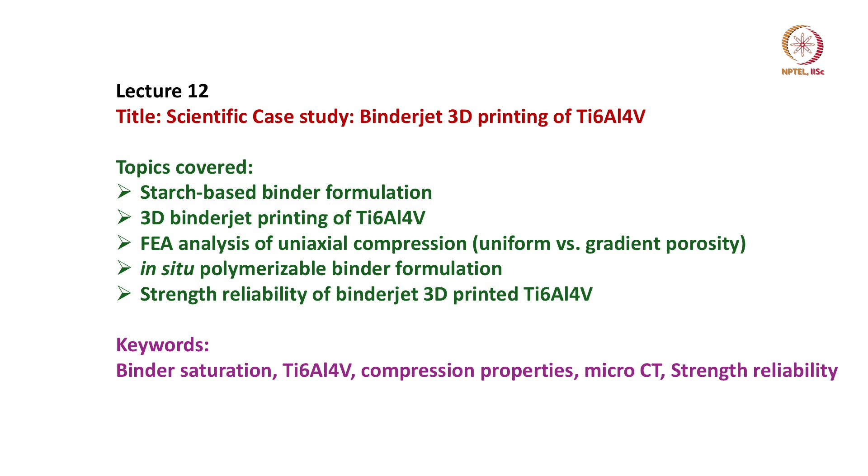So, in this lecture I will be presenting the first scientific case study on the binder jet 3D printing of titanium 6 aluminum 4 vanadium. This titanium 6 aluminum 4 vanadium is one of the materials used for a spectrum of applications from aerospace to biomedical applications. We have started working on binder jet 3D printing. The first material that we have tried is Ti6Al4V, and we have used several binders. The first binder is a starch based ink.

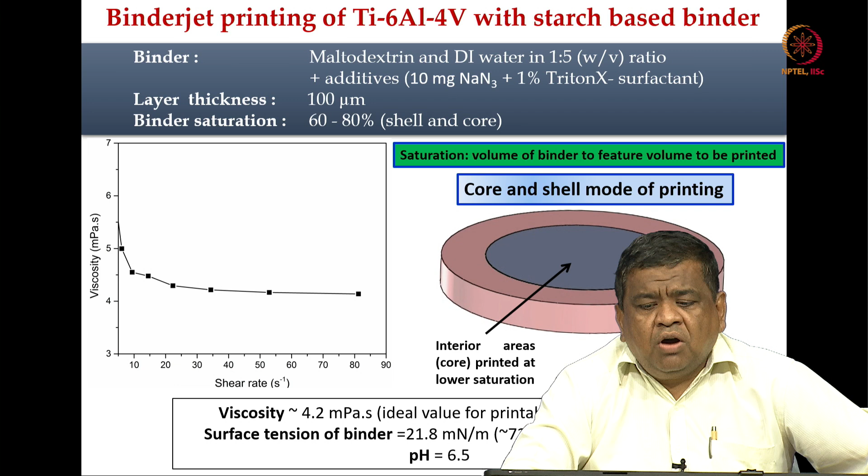So, what are the experimental details? We have used maltodextrin and deionized water in a 1:5 ratio, and we have used certain additives like sodium azide and 1% Triton X surfactant. Layer thickness we kept at 100 micron, and binder saturation was 60 to 80%, in shell to core mode.

What is core and what is shell mode of printing, that I am showing here, and I am going to show another scientific case study in the subsequent lectures, where I will show that this core shell mode of printing is essentially not advantageous for ceramics, and it leads to inhomogeneous microstructure and properties, but for metals it has not been that challenging, and we have used binder saturation of 60 to 80%.

And what is the definition of binder saturation? That is how much is the volume of binder to the feature volume to be printed. So, that means 60% of the volume of the binder is used to print a certain feature volume. So, these are the interior areas of the core printed at lower saturation, and this is the exterior walls that is printed at the higher saturation.

So, this particular binder, which was essentially maltodextrin and deionized water, has a viscosity of around 4.2 millipascal second, and ideally for binder jet printing the viscosity should be less than 30 millipascal second. So, that is fine. Surface tension of the binder is 21.8 millinewton per meter, and for deionized water it is 72. So, surface tension is greatly reduced by the use of maltodextrin. pH is 6.5.

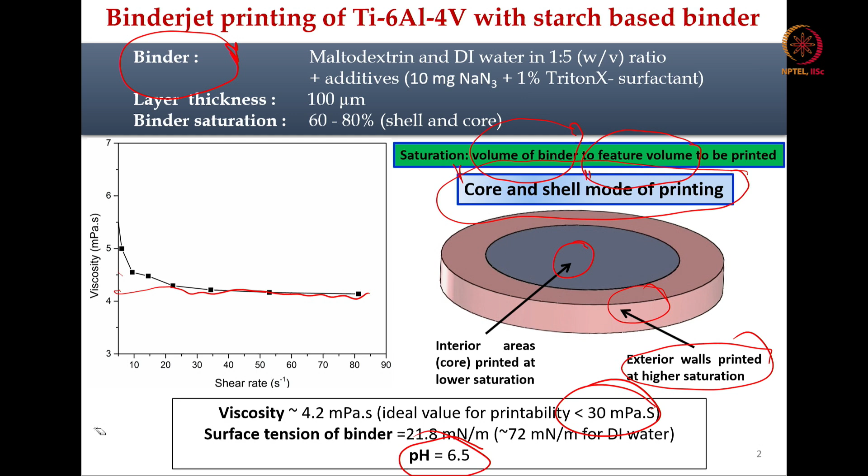We also made some attempts, but we still need to work on it, at the femoral stem part of these materials. We find it challenging to fabricate a femoral stem component with clinically acceptable strength properties, and therefore, we still need to work

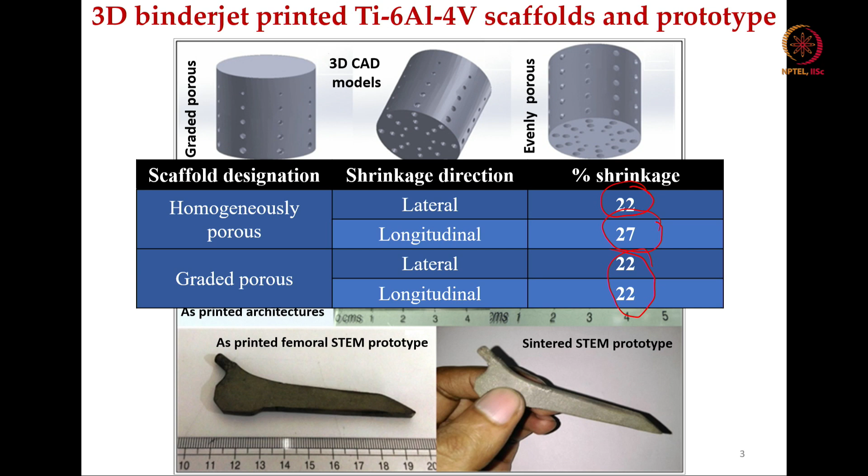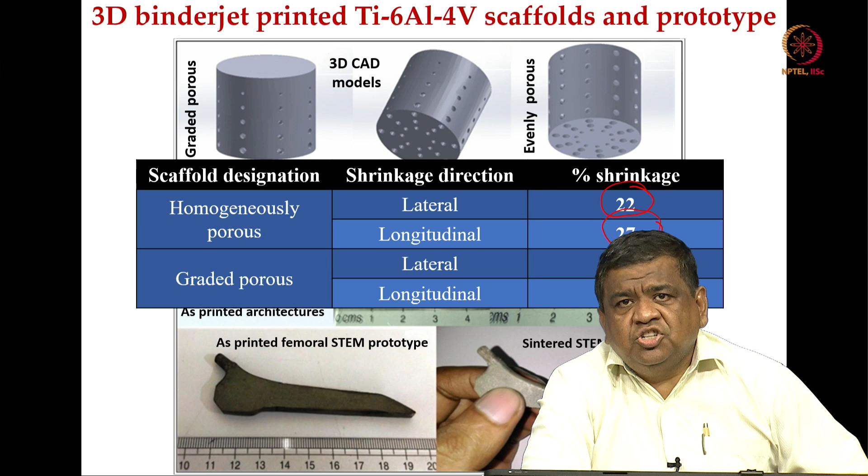on that. Now, in terms of the homogeneously porous scaffolds and graded porous scaffolds, we found in the lateral direction it is 22% shrinkage, and in the longitudinal it is 27% shrinkage. But the graded porous materials are much better, because in both directions we found uniform shrinkage. But homogeneously porous ones have certain anisotropic shrinkage properties. So, from the manufacturing perspective, I think this uniform, non-anisotropic shrinkage is much better.

We use microcomputed tomography analysis. This microCT analysis is something that I have taught you before. Just to recall, microCT essentially uses a high energy X-ray beam, like a 70 kilovolt X-ray beam, which is focused on a 3D object, and then it gives you 2D slices or 2D projections, what we call ortho slices. Now, when these 2D ortho slices are reconstructed in the z direction, you get a 3D reconstructed volume.

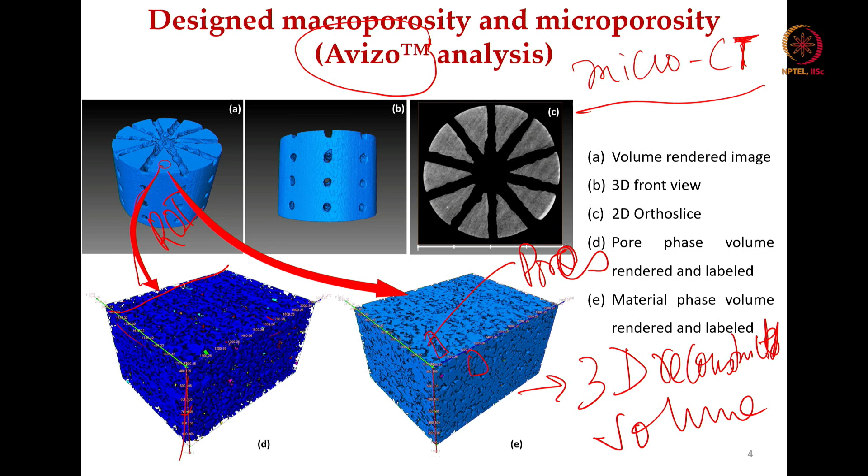So, what you see here is essentially a 3D reconstructed volume, and in this 3D reconstructed volume you can clearly see these are pores. This is taken from your region of interest or volume of interest, and when you put this volume of interest in x, y, z directions, you get this kind of porous structure. And we are more interested in the gradient in porosity, and seeing that by introducing the gradient in porosity, you can develop better properties, or whether properties are being optimized or compromised. We have used a specific software platform, Avizo software, which is used for quantitative analysis of the 3D microstructure.

What we have done is take these 3D microcomputed tomography results and use them as an input to the ANSYS Workbench. There are two ways you can do this biomechanical analysis. One is that you give the original CAD models as an input to the ANSYS platform, either CAD models of uniform porosity, evenly porous, or gradient porosity.

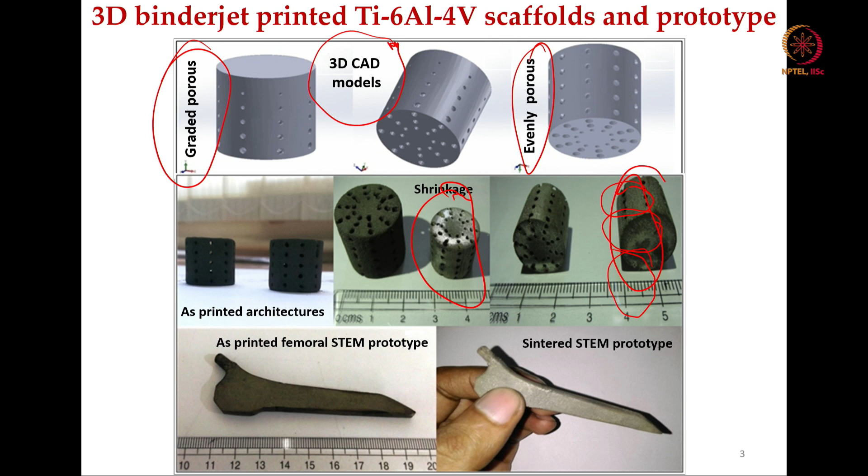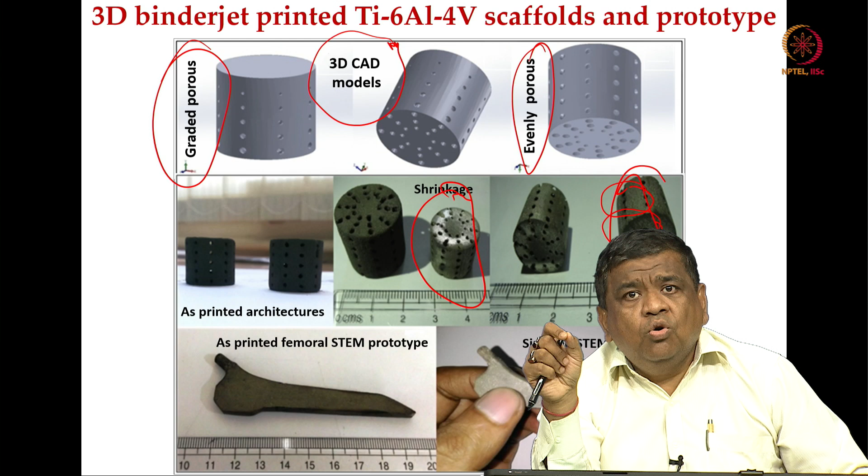But remember, when you are doing compression tests on these cylindrical constructs, the samples which are being 3D printed and post processed do not have the designed porosity that you introduced in the 3D CAD model, because they have microporosity, very small pore size, which is inherent in any 3D binder jet printing, plus there are shrinkages associated with binder jet 3D printing and post-processing heat treatment or sintering. All these change the 3D microstructure of the as-printed and post-processed component compared to what you see in the 3D CAD model, right.

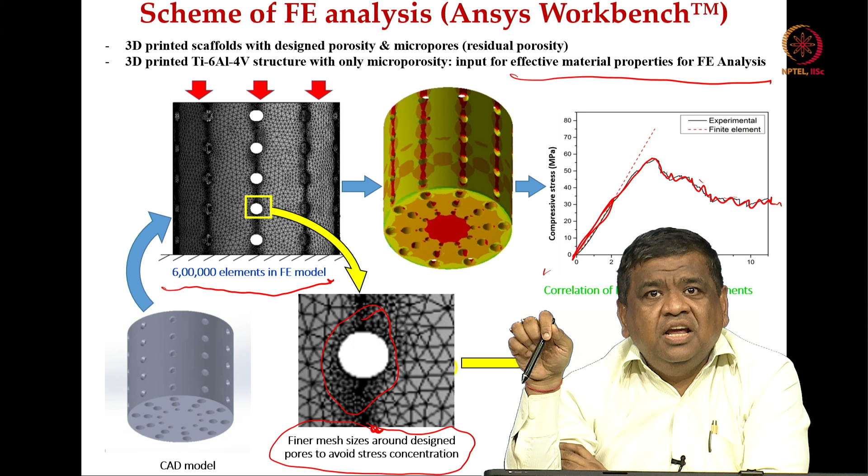You have the compression, linear response, and then like any other brittle material, because it has a lot of porosity, it behaves more like a ceramic material, because I have shown you in earlier lectures how ceramics behave under compression. And if you remember correctly, it is a linear response, then very non-linear yielding of the material. After reaching the maximum load, it shows a gradual decrease, the falling load part, and this is exactly what has been shown here, where I have put the arrow.

From this initial linear part, you can find the slope, and the slope shows you the elastic modulus. What is the dotted line? The dotted line is the finite element approximation. What is the thick line? The thick line is your experimental results. Here, finite element analysis can only provide the linear response part, not the non-linear response part, because the model is a linear elastic model.

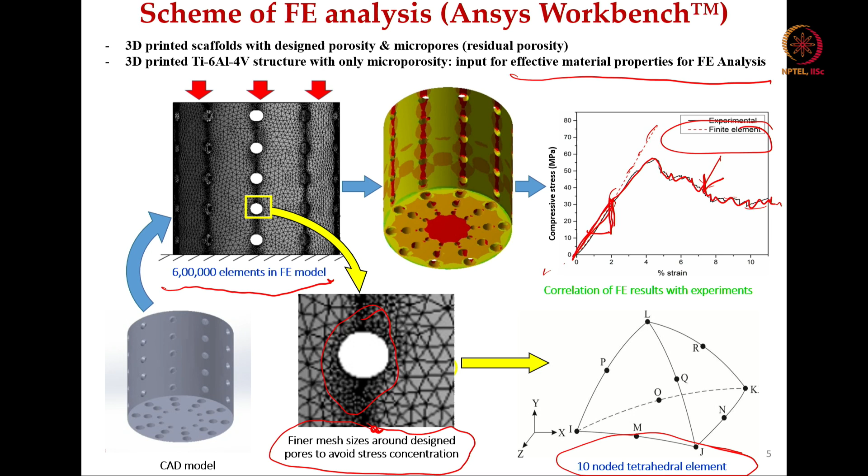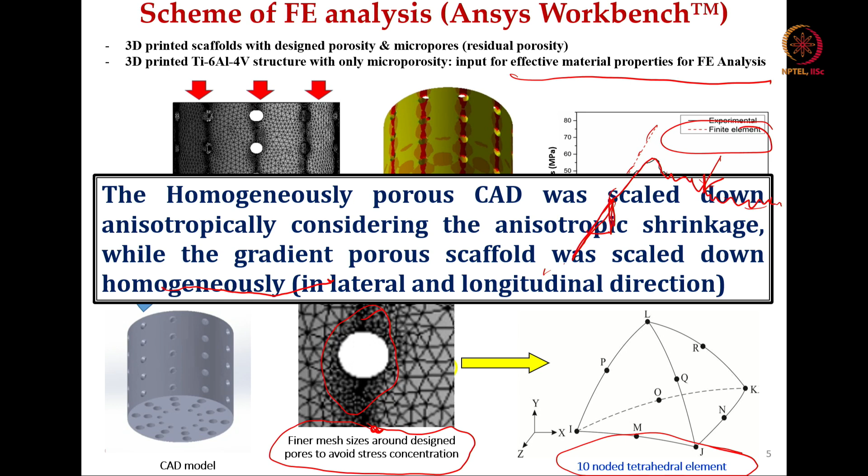This homogeneously porous CAD model was scaled down anisotropically, considering anisotropic shrinkage, while the gradient porous scaffolds were scaled down homogeneously in lateral and longitudinal directions. Because if you remember, the gradient porous scaffolds underwent uniform shrinkage in both lateral and longitudinal directions of 22%, whereas the uniformly porous scaffolds underwent anisotropic shrinkage.

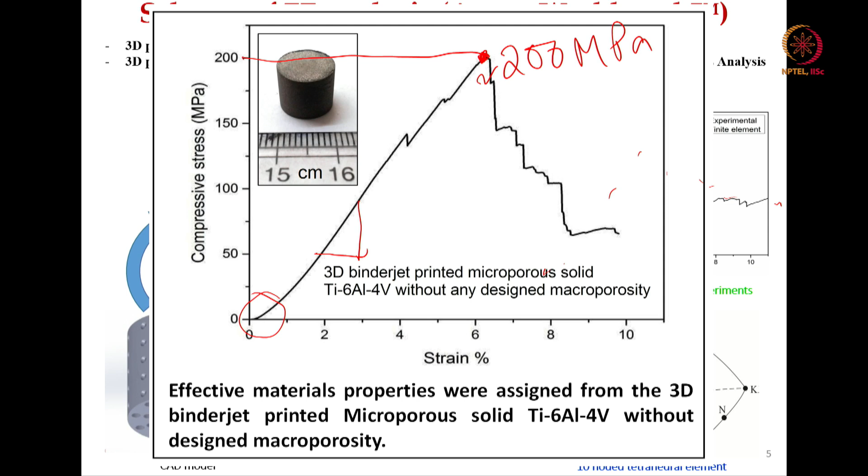What you see is that same 3D binder jetted microporous scaffold. You can get a compression strength of somewhere around 200 megapascal, and this shows a very linear increase. The non-linear initial part can be neglected because the sample is getting settled during placement on the machine. This is more on the analysis of the stresses around the pores. From the earlier slides, in our finite element model, this is the uniform pore size, and around the pores the mesh concentration is increased to capture a more realistic distribution of stresses.

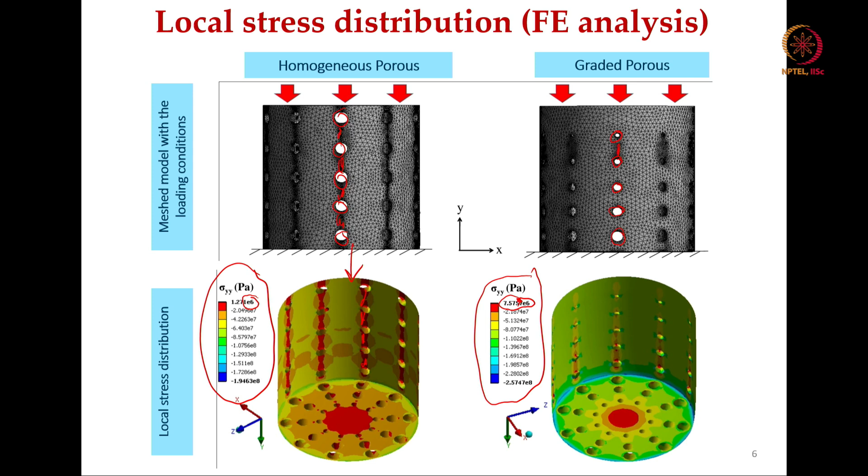In the same 2D plots, for the same 3D reconstructed images, when you consider the von Mises stresses, the local stress distribution around the pores, sigma yy, is in Pascal. So it is 10 to the power 6, this is megapascal. It is 1.3 megapascal. Around the pores, the reddish region has more stress concentration. In the gradient porous region, there is a gradient from very small pores going to large pores, and here the stress concentration is more. The red region represents 7.6 megapascal. This is more stress concentration compared to the homogeneously porous structures.

This is just a comparison between experiments and finite element analysis, and what you see is that finite element analysis, in both cases, captures very clearly the experimentally measured linear response with similar slopes.

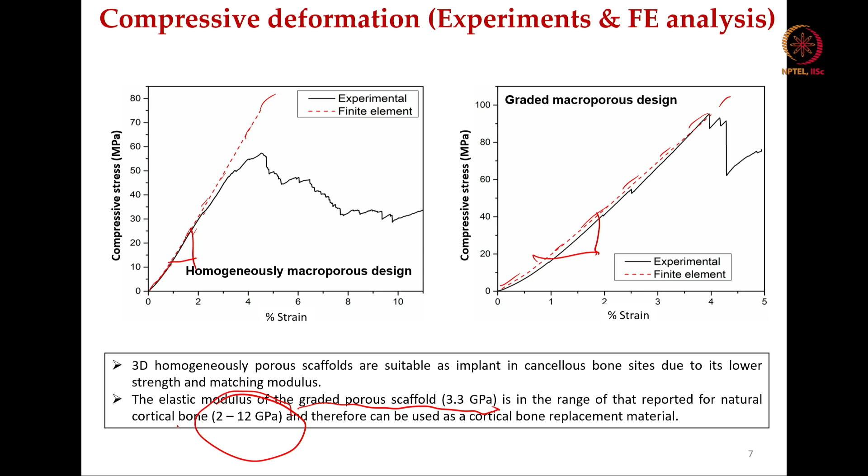That means the modulus is also very similar. The elastic modulus in the graded porous scaffolds is 3.3 gigapascal, whereas cortical bone has 2 to 12 gigapascal, and we can use it as a cortical bone replacement material. Compression properties: in the case of homogeneous porosity, total porosity is around 57 volume percent, whereas in the case of gradient porous

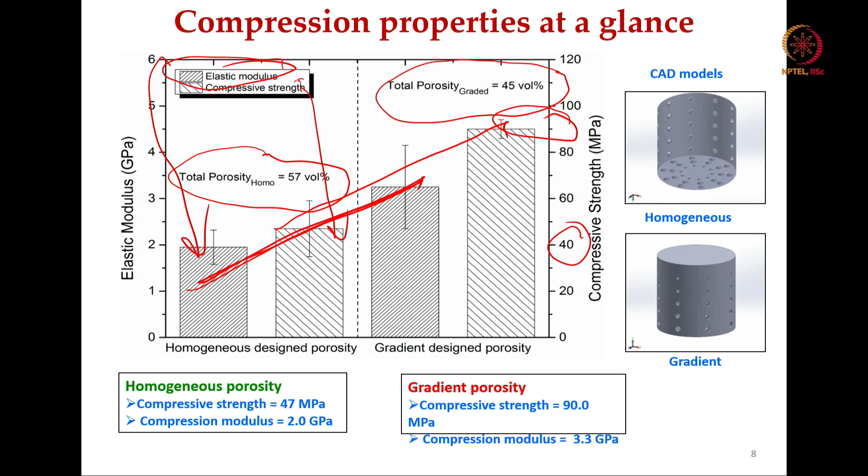So, it is very clear that gradient porous structures have better compression properties. That is very clear, right.

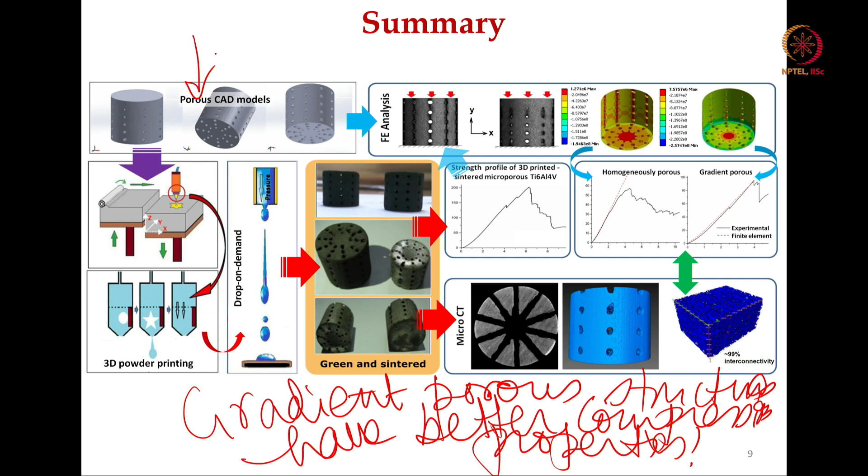So, in the last several slides as part of this scientific case study, what you have learned is how to design simple solid cylindrical structures with uniform or gradient porosity using SolidWorks as a computational platform. Then how to do finite element analysis by constraining one end of the cylinder, applying the load on the other end, and introducing a concentrated mesh around the pores so that you can capture a realistic distribution of the stresses. From there you can also see how the strength profile can be predicted in the case of homogeneously porous and gradiently porous structures. In both cases, the linear responses in the FE are very close to the experimentally measured linear response.

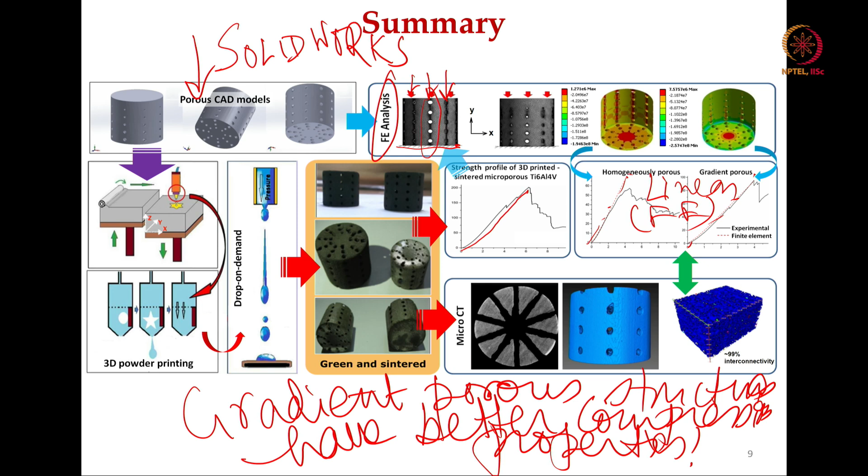One of the things that we have learned is that when you use finite element analysis and experiments together, particularly in the context of metal 3D printing, you should use the final component structure, after the 3D printing and post processing are over, as an input to the finite element model, and certainly not the initial component design produced in the CAD model on SolidWorks or a similar platform. Simply because when you do 3D printing and post processing, the material undergoes shrinkage and develops microporosity, which is an inherent disadvantage of these 3D printing based processes that you cannot avoid, and all those microstructural elements or defects cannot be captured a priori in the CAD design file. So, I repeat, micro-CT based 3D reconstructed images must be used as an input to the finite element model, and only then can you get very good correlation with the experimental results.

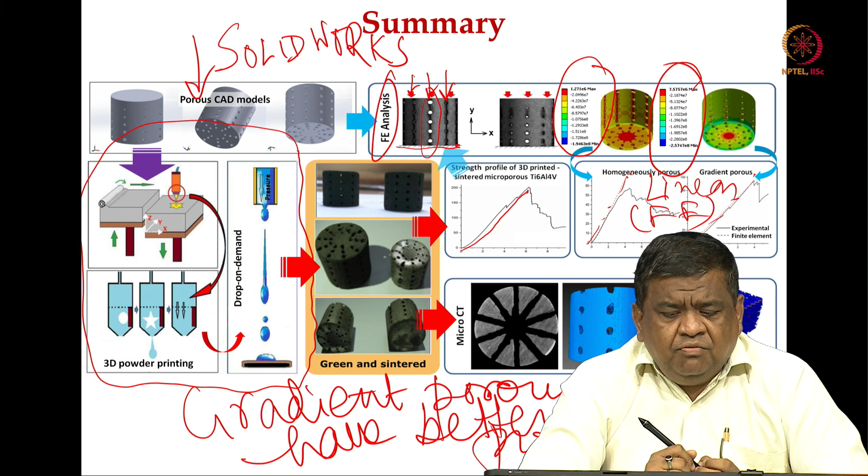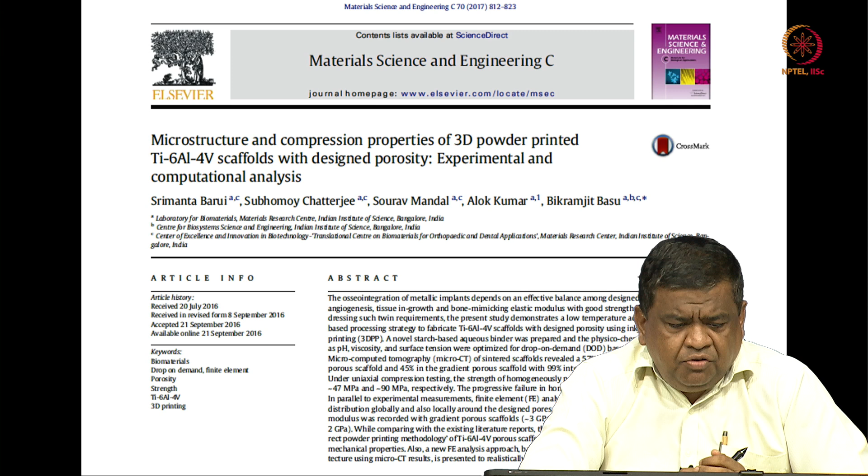We have also seen how the stress concentration, particularly sigma YY, varies in both homogeneously porous and gradiently porous materials, and these materials were printed using a starch based binder like maltodextrin added to deionized water. Therefore, surface tension is much lower than that of deionized water, and viscosity is also within the printable binder range. This scientific case study was published a few years ago, and the lead author was Srimanta Barui, who is currently a postdoc in the United States, and it is on 3D powder printed Ti6Al4V scaffolds with designed porosity.

So, overall this kind of study can be conducted, and I must emphasize that there is a need to do both experiments and computational or theoretical analysis in the 3D printing community, so that our understanding will be based on a more solid platform to realize these processes and properties in a much more predictable manner.

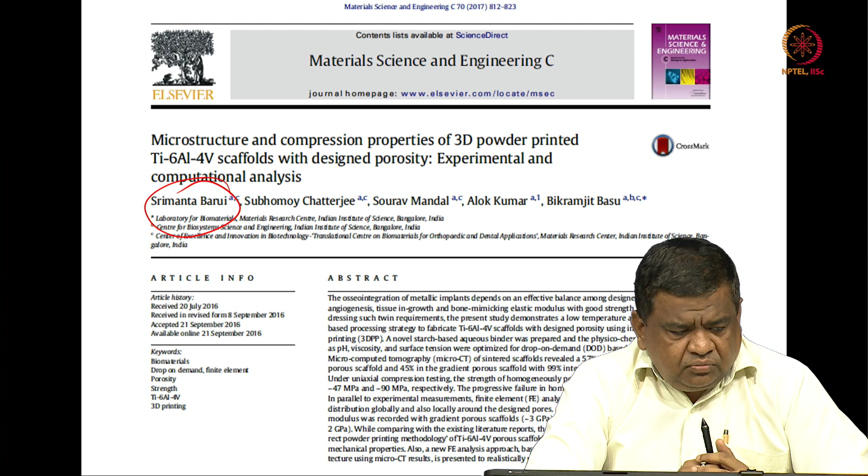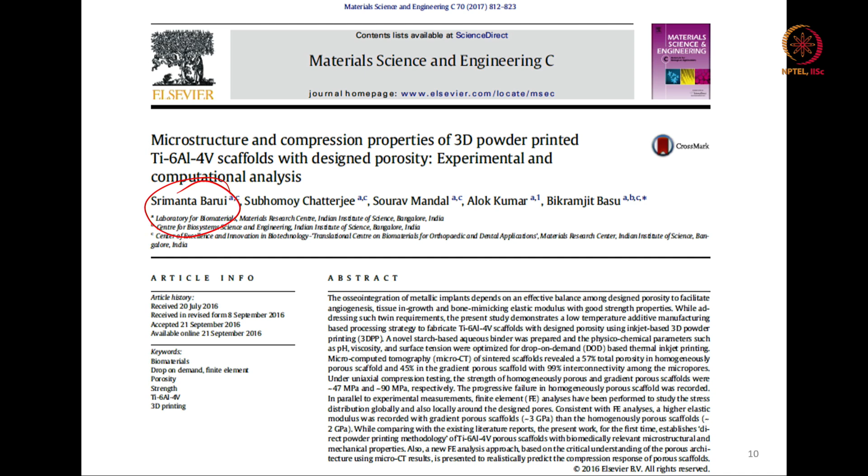I will continue with more scientific case studies in the next few lectures related to binder jet 3D printing, and subsequently I will start with the process science description of laser based 3D printing, because binder jet 3D printing does not involve the use of any laser beam or electron beam. It is much simpler process wise, but at the same time it is not extremely well understood when its process science was explored. We have discussed that process science, and we will also discuss more scientific case studies, so that you will be in a position to appreciate the use of binder jet 3D printing not only for metals but also for ceramics. And then I will show you a couple of examples through the case study to substantiate our discussion in today's lecture.